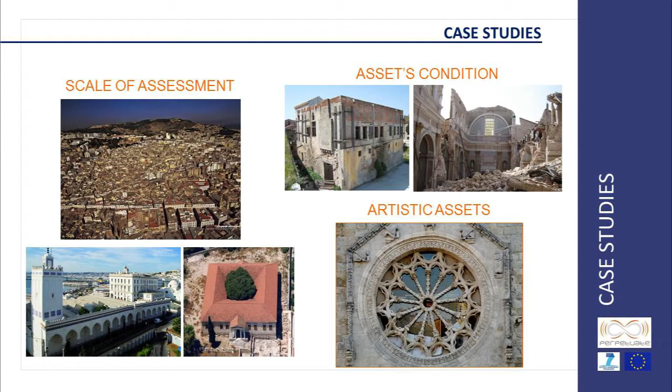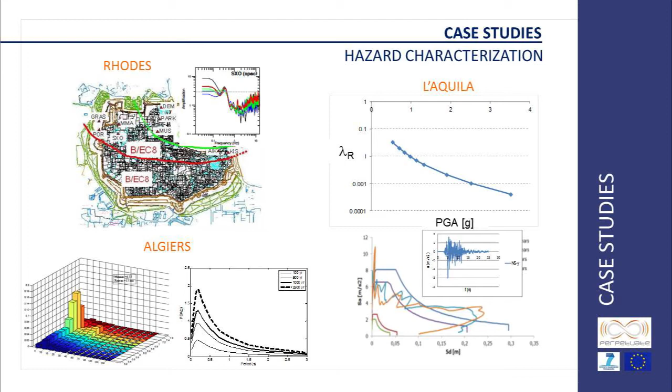An accurate probabilistic seismic hazard characterization has been provided for the considered sites, supported by in situ microtremor survey and array measurement for the soil characterization. Moreover, for each case study, the data related to the built information have been collected, including in some cases also ambient vibration measurements for the structural identification.

The earthquake occurred on the 6th of April 2009 in L'Aquila, Italy, seriously damaged the cultural heritage with local or extensive collapses. In the PERPETUATE project, two important monuments have been analyzed: Ardinghelli Palace, in which serious damage occurred to important frescoes, and Santa Maria Paganica Church, which collapsed almost completely.

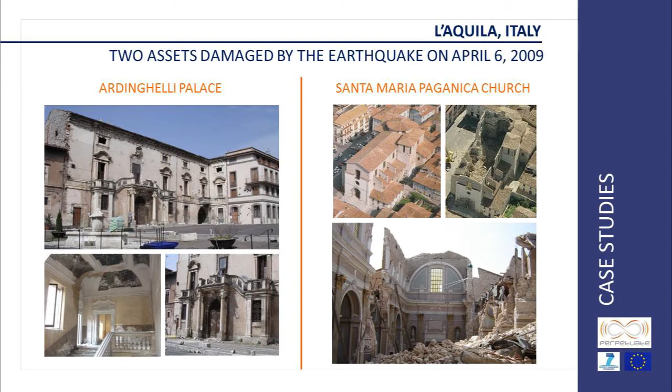The case of Ardinghelli Palace has represented an exclusive occasion to validate the models developed in the PERPETUATE project for both the analysis of global response and local mechanisms. In fact, the comparison between the simulated and real damage occurred has turned out to be a key validation. To this aim, both nonlinear static and dynamic analysis have been performed.

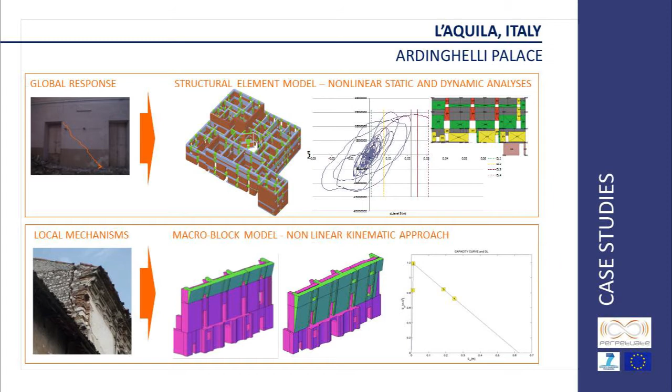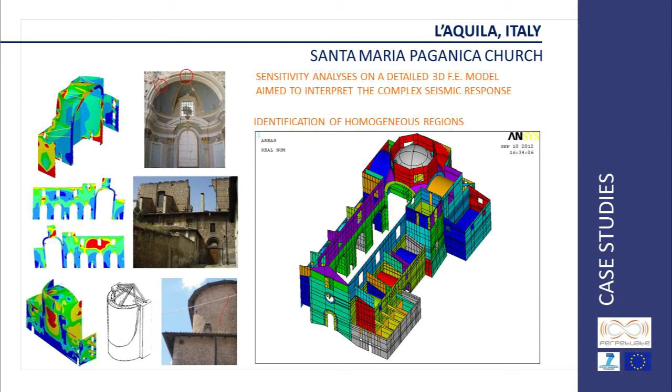In the case of Santa Maria Paganica Church, some parametrical analysis performed on a 3D detailed finite element model have allowed us to interpret the complex reasons of the extensive collapses, mostly related to some invasive structural transformations, like the replacement of the original wooden roof with a heavy reinforced concrete slab. The results achieved are useful also to address the most suitable structural solutions to be adopted in case of reconstruction.

San Pardo Cathedral in Larino was slightly damaged by the earthquake in Molise region in 2002. Damage occurred in those parts that were recently retrofitted. Nonlinear kinematic analysis performed on the most vulnerable macroelements have constituted the tool for identifying the most meaningful parameters and addressing the plan for in situ investigations.

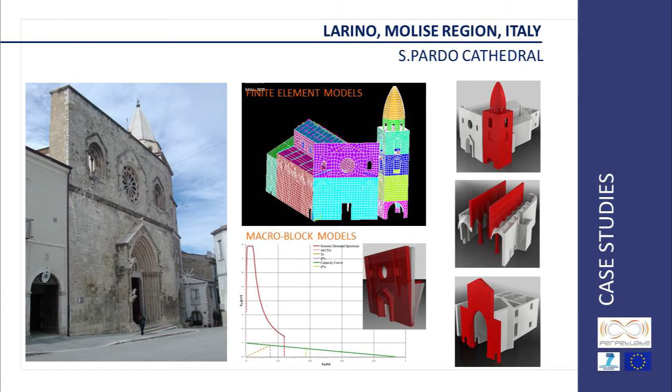Then, according to the procedure proposed in PERPETUATE for this class, the final assessment has been carried out by combining the results of a 3D finite element model aimed to evaluate the load distribution among macroelements with a full set of nonlinear kinematic analysis on each single macroelement.

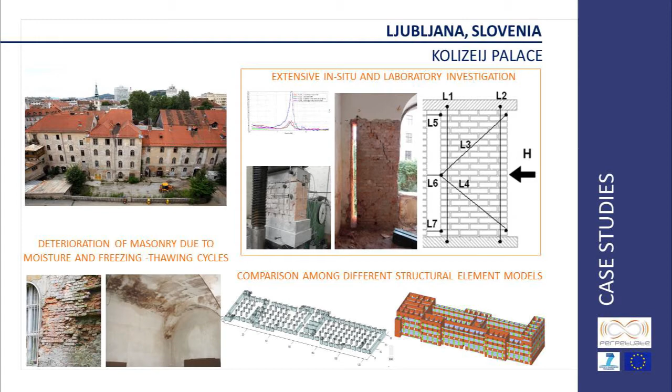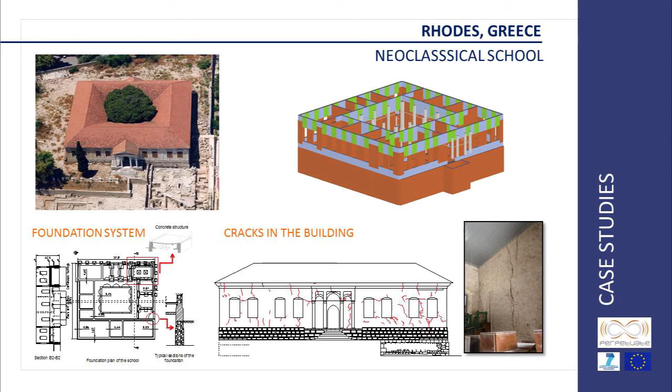The neoclassical school in Rhodes is very interesting because of the complex foundation system, partially realized over the debris of ancient pre-existing structures. The original results obtained by PERPETUATE on the problem of soil-foundation interaction, implemented in the TREMURI program, allowed us to simulate their effects on the seismic assessment of the building.

The Arsenal de Milly is a simple structure at first glance. However, it is strictly connected on one side to the huge defensive city walls, which give an eccentric constraint to the dynamic response of the building. The results obtained by different linear and nonlinear models, including also the soil-foundation interaction effects, have been compared.

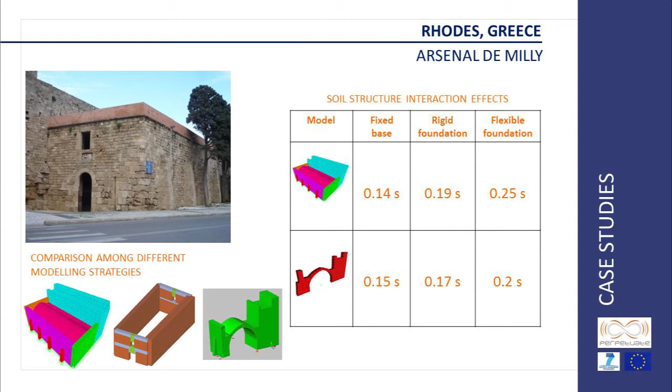In Rhodes, also the Hassan Bey's mansion has been analyzed. It is a historical building not in use at the moment and in bad conditions. The PERPETUATE assessment procedure has been applied completely, starting from the as-built information phase, enriched by a rigorous sensitivity analysis aimed to account for different sources of uncertainties.

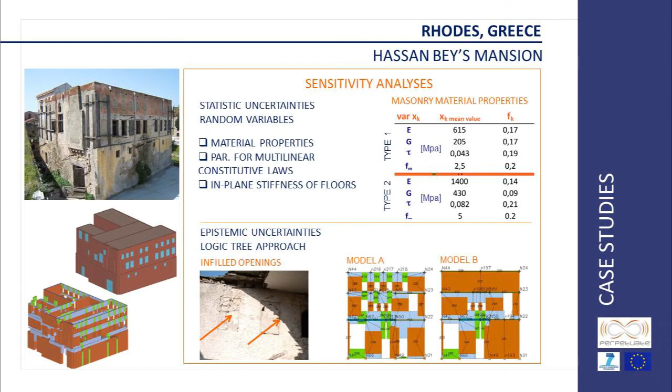The final assessment by the TREMURI program has shown the actual safety level of the structure is too low and allowed us to identify the critical aspects of its seismic response. This turned out very useful for the design of the most effective and conservative strengthening solutions.

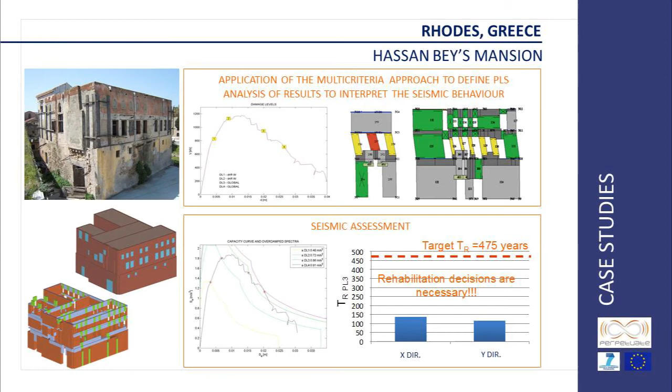Finally, the assessment of the Great Mosque in Algiers has shown how it is possible to integrate the results of different modeling strategies. As the roof system cannot be considered as rigid in its horizontal plane, the most vulnerable macroelements of this mosque are the internal arcade systems. To this aim, both nonlinear finite element models and macro-block models have been used, in order to have a cross-validation and define the final capacity curve and the performance levels.

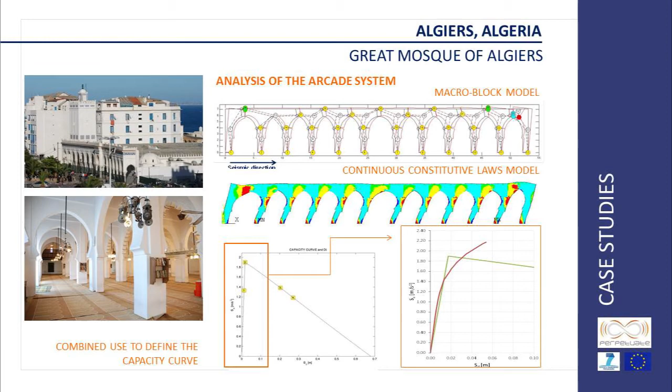Algiers is one of the areas selected for the application of the procedure at urban scale.

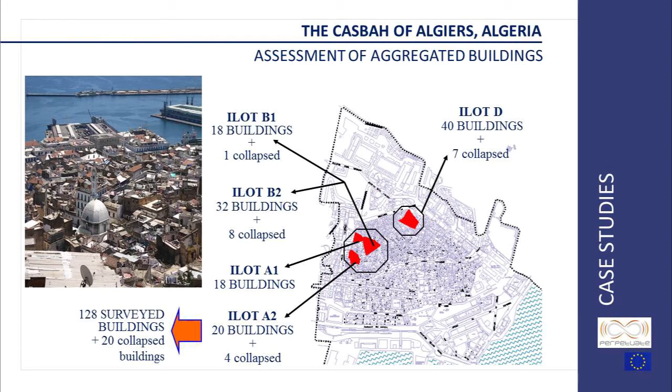The Casbah, included in the UNESCO list of World Cultural Heritage, is made up of a very complex aggregation of buildings. About 150 buildings have been directly surveyed, promoting close collaboration with local architects and authorities. An in-depth analysis of the geometrical and structural characteristics of the buildings has been made, discovering interesting ancient constructive solutions and valuable artistic assets also in a rather poor environment.

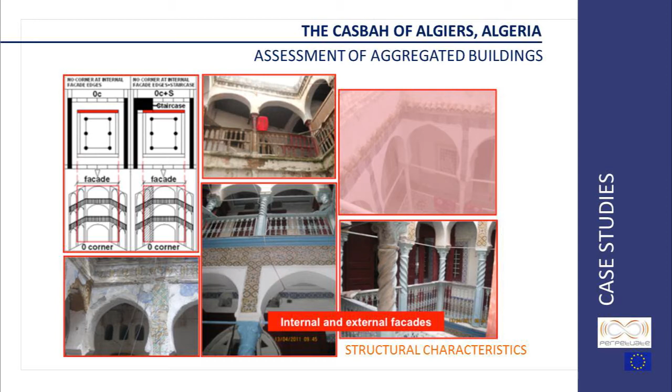Local damage mechanisms have been identified, mostly related to the overturning of the facade, due to foundation settlement and maybe in some cases to previous earthquakes.

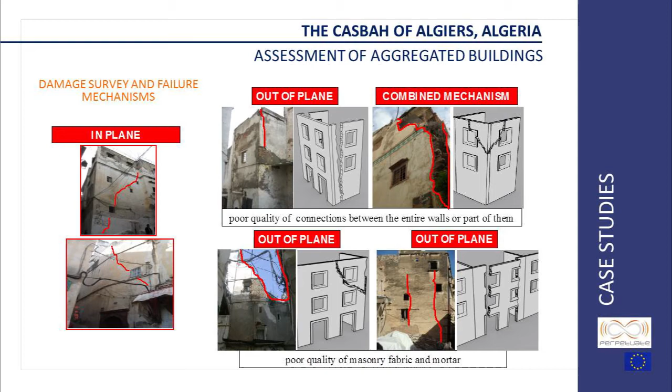The FaMIVE and LOG-IDEAH tools, the latter originally developed within the PERPETUATE project, have been widely applied. This allowed us to get a quantitative assessment at territorial scale, useful for planning mitigation strategies and priorities of intervention.

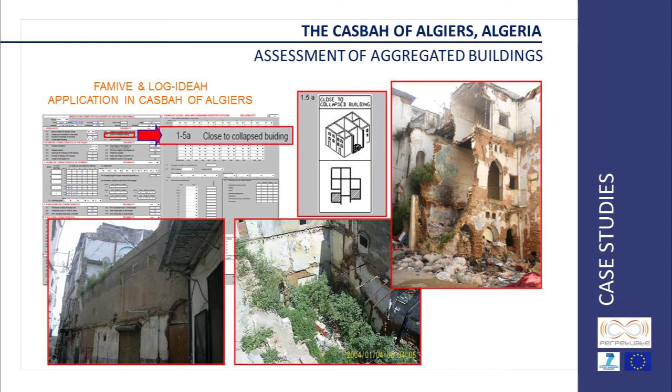Moreover, two case studies at urban scale have been examined in Slovenia. The first one concerns the rural settlement sited in the western part of Slovenia in the Bovec Basin. It is particularly interesting since it has been recently struck by several earthquakes, representing an opportunity to validate the efficiency of the proposed methodology.

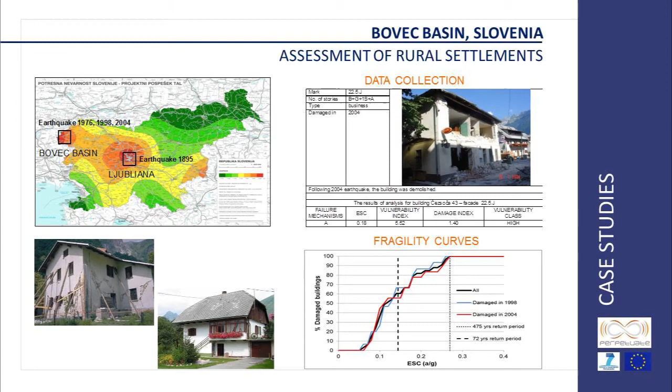The second case study in Slovenia is the old city center of Ljubljana. Its constructive features and state of maintenance are completely different from those of the Casbah of Algiers, providing a representative example for historical centers in European countries. Fragility curves have been obtained for the seismic performance of the historical center as a whole.

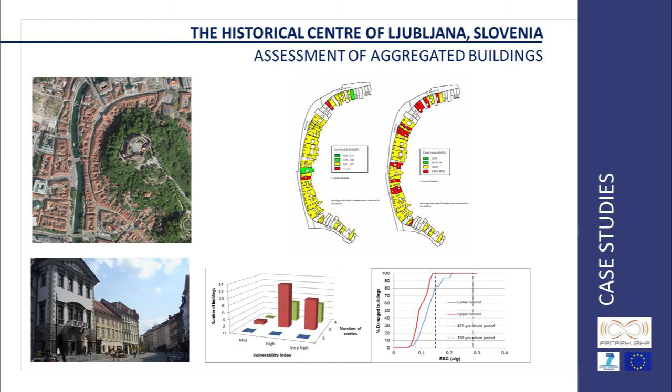The main idea of this vulnerability study was to evaluate the seismic resistance of old city center depending on different levels of knowledge. The FaMIVE method, which we applied for this study together with the University of Bath, showed to be very efficient in predicting some particular failure modes.

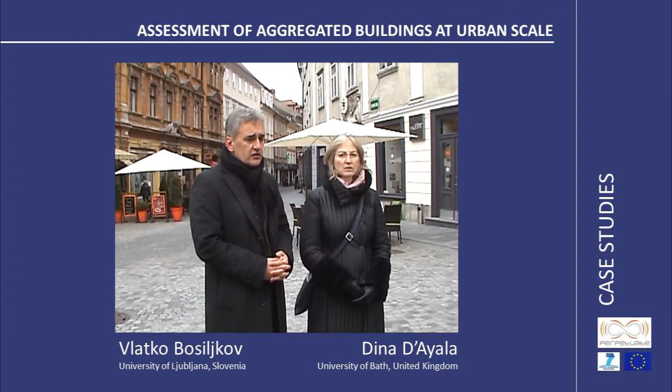Failure modes that are going to happen helped us in re-strengthening these buildings with provisions that are not so invasive, mainly by tying the walls and preventing out-of-plane failure, which during the earthquake in 1895 that hit this area provoked most of the building failures.

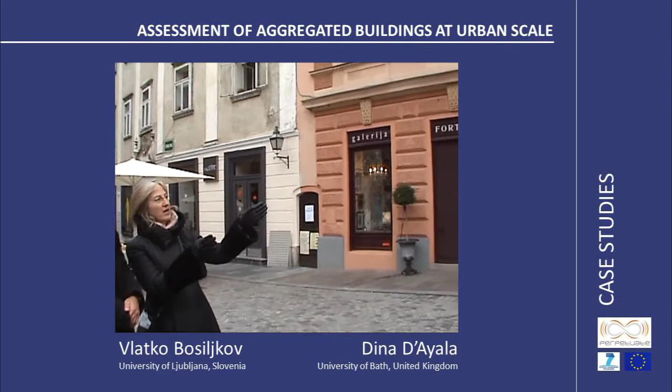This case study is particularly interesting because, as you can see, we have an earlier portion which is much more ancient with a lower number of stories, and the structure of the roof is much more original and faithful to the medieval construction characteristics.

And then as we move closer to the city center and to the river, we instead have houses characterized by a much higher level of alteration, to the extent that we have very large openings at the ground floors, and quite high openings also at the upper floors, which are more in line with neoclassical architectural styles.

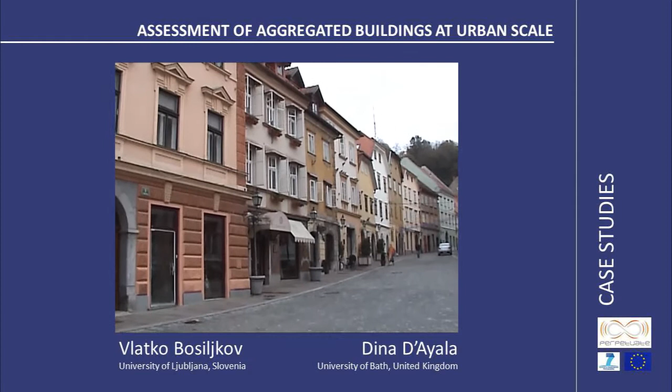Our case study comprehends the styles of different periods, from the 14th century to the 20th century. So this whole study will also help us see how building technique was developing and how it affects the seismic vulnerability of old city centers. This is an additional value for this study.

Yes, and maybe we will try to go to one of them. Very good.

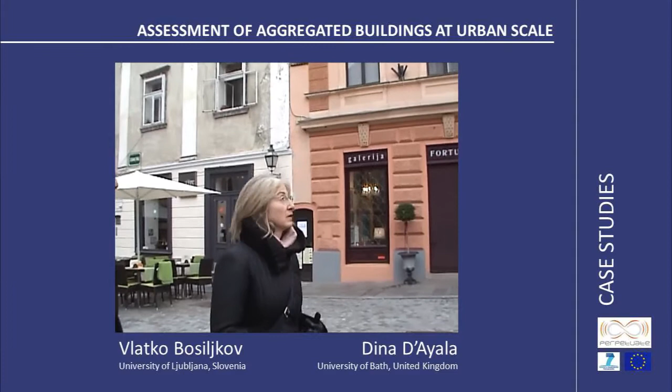One interesting feature that can be pointed out is that these houses already have original ties in their fabric. These ties were usually included in the construction in order to tie together the walls, the facade to the party walls, especially in cases where there is a gap between adjacent buildings, but also to connect the floor structures to the wall structures, which again helps prevent out-of-plane failure.

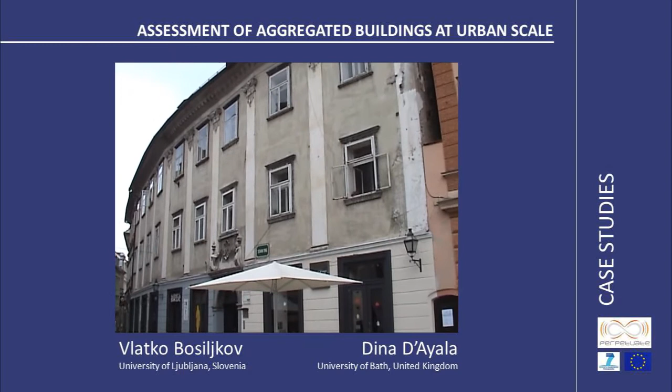These features also point toward the type of interventions that Vlatko was talking about before, which we intend to include as a proposal for increasing the resilience of the whole city center to earthquakes, using interventions that are very much in line with the original fabric and at the same time can substantially improve the overall behavior.

The main idea of this strengthening technique is to increase the resistance for the return period of 100 years up to a level where you will not suffer major damage. We cannot prevent the collapse of the structure with these minor strengthening techniques for the return period of 475 years.

But certainly we can increase the resistance for the probability of occurrence of a seismic event which is more probable than that.

This is also important from the perspective of reversibility of intervention. We don't expect and don't pretend that we now have the tools to solve the problem and ensure the survival of these buildings for the next 500 years. But we certainly know that with modest and relatively light-handed interventions, we can significantly reduce the damage that would occur, and help the owners understand how to strengthen their buildings.